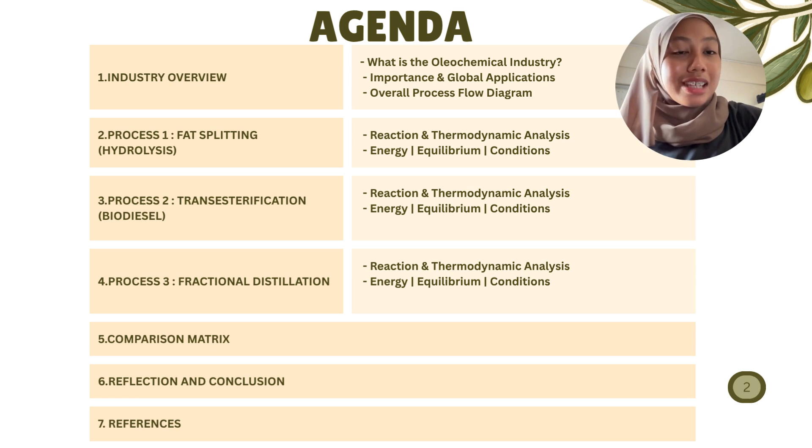So our presentation will begin with a brief overview of the industry and its importance, followed by an overview of the global oleochemical market. Next, we will discuss the production process and the main types of oleochemical product, which has three. Firstly is process one, which is fat splitting. Next is transesterification, and lastly is fractional distillation. Next, we look into the comparative guide, which is thermodynamics in oleochemical processing. After that, we will conclude the presentation and also there's some reflection on our discussion.

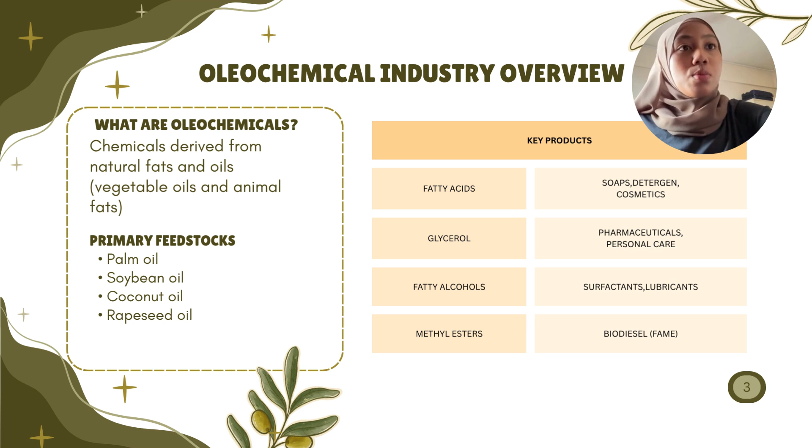Firstly, let's look at what the oleochemical industry is. So, oleochemicals are chemical products derived from natural oils and fats, mainly vegetable oils such as palm oil, coconut oil, soybean oil, and animal fats. Unlike petrochemicals, which are produced from crude oil, oleochemicals come from renewable and biodegradable resources, making them more environmentally friendly. The industry mainly produces fatty acid, fatty alcohol, glycerin, and fatty ester. These products serve as essential raw materials for manufacturing soap, detergent, cosmetics, personal care products, lubricants, pharmaceuticals, food additives, and even bio-based plastics.

Next, I will discuss the importance of the oleochemical industry and its global application. The oleochemical industry is increasingly recognized as an important sector because it supports the transition toward more sustainable and environmentally responsible manufacturing. One of its key advantages is that oleochemicals are derived from renewable resources such as plant oil and animal fats. Unlike fossil-based feedstock, these resources can be continuously replenished, making them a more sustainable option for long-term industrial use. In addition, oleochemicals are biodegradable, meaning they can naturally decompose in the environment. This characteristic reduces their environmental impact and makes them a preferred alternative to many petroleum-based chemicals, particularly as the industry seeks to comply with stricter environmental regulation.

Another significant advantage is their versatility. Oleochemicals serve as essential raw materials in a wide range of industries, including personal care and also biofuels. Their diverse applications demonstrate their importance in supporting both industrial production and everyday consumer products. Malaysia also plays a significant role in the global oleochemical industry. As one of the world's leading producers of palm oil, the country provides a reliable and abundant supply of feedstock for oleochemical manufacturing. As indicated on this slide, Malaysia produced approximately 19.9 million tons of crude palm oil, highlighting its contribution to the global supply chain.

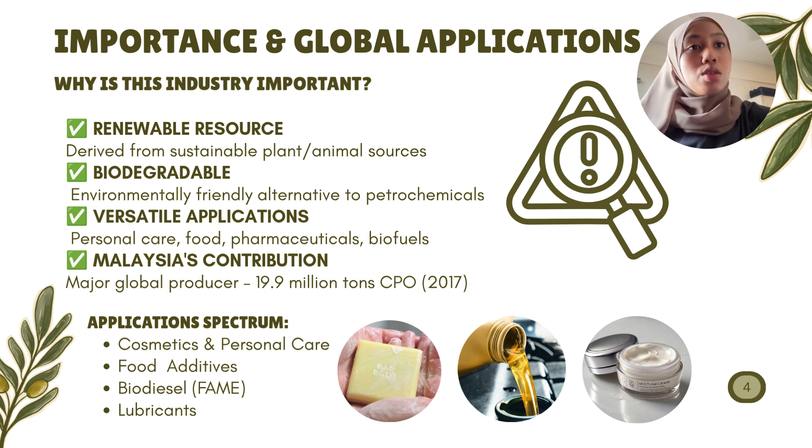In terms of global application, oleochemicals are widely used in the production of cosmetic and personal care products, where they function as surfactants, emollients, and emulsifiers. They are also incorporated into food additives, utilized in the production of biodiesel, particularly fatty acid methyl ester or FAME, and applied in the formulation of lubricants for industrial and automotive use.

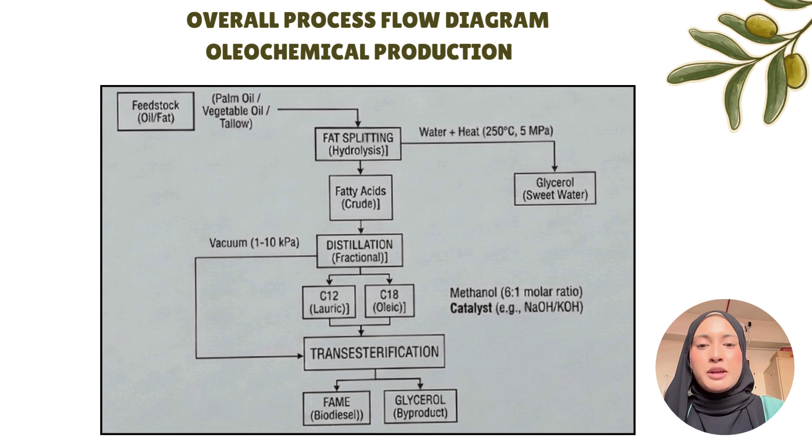Now, I will continue to explain the overall process flow of oleochemical production. We start with the feedstock oils or fats such as palm oil, vegetable oil, or tallow. These undergo fat splitting, also known as hydrolysis, where triglycerides are broken down using high temperature and pressure water. This produces crude fatty acid and also glycerol. Next, the fatty acids are purified through fractional distillation under vacuum conditions, separating them into components like lauric acid and also oleic acid. Finally, through transesterification with methanol and a catalyst such as NaOH and KOH, we will obtain fatty acid methyl esters, FAME, commonly known as biodiesel, along with glycerol as a byproduct. This diagram gives us the big picture of how natural oils are converted into valuable oleochemicals.

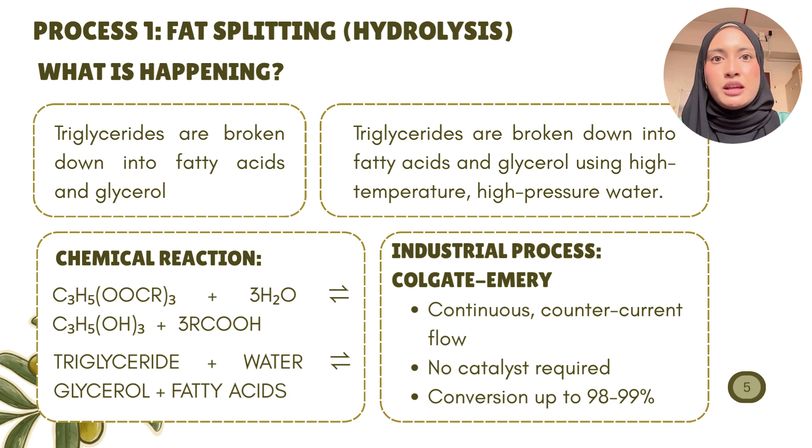Let's zoom into the first process, which is fat splitting. Triglycerides are broken down into fatty acids and glycerol using high temperature and high pressure water. The chemical reaction is: one triglyceride molecule reacts with 3 water molecules to form glycerol and 3 fatty acids. In industry, the Colgate-Emery process is widely used. It is a continuous countercurrent flow system that requires no catalyst and achieves conversion rates of up to 98 to 99%. This makes fat splitting highly efficient and practical for large-scale oleochemical production.

Next, let's talk about the thermodynamic analysis of process 1, which is fat splitting. So the first one is thermal effect. It is between 150 degrees Celsius and 280 degrees Celsius. The reaction shows no significant heat change and it is thermally neutral, with delta H approximately equal to 0. The next one is energy requirement. Even though the reaction itself doesn't require heat, energy input is needed to reach operating temperatures of 250 to 330 degrees Celsius, to maintain water in the liquid phase under high pressure and provide steam for stripping. Typically, about 26 pounds of steam are required for 100 pounds of tallow.

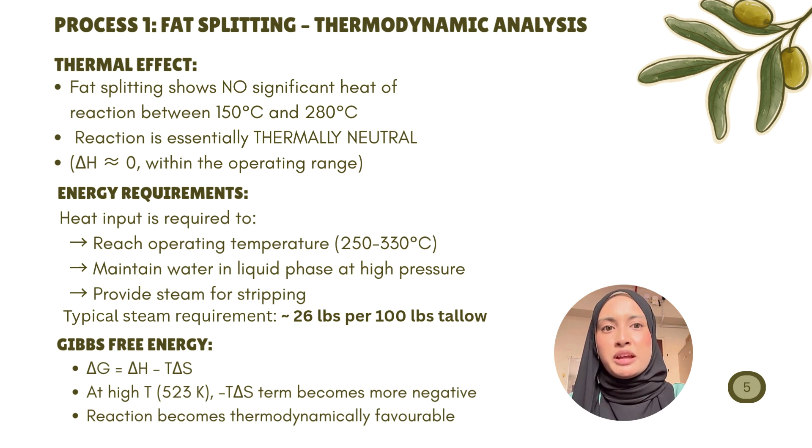Lastly is Gibbs free energy. The key driving force is entropy. The Gibbs free energy equation is delta G equals delta H minus T delta S. So at high temperature, the minus T delta S term becomes more negative, making the reaction thermodynamically favorable.

Good day everyone, so I will continue with process 2, which is fractional distillation. After hydrolysis, a crude fatty acid mixture containing different fatty acids is produced.

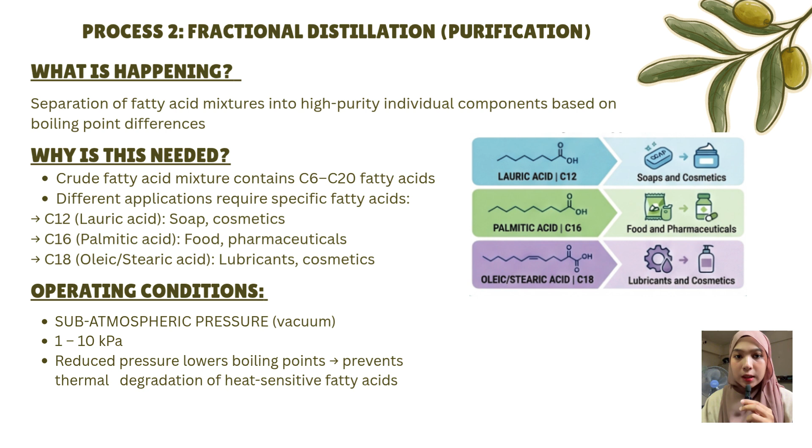So the purpose of fractional distillation is to separate these fatty acids into high purity individual components based on their boiling point difference. This separation is important because different fatty acids have different industrial applications. For example, lauric acid C12 is used in soap and cosmetics. Palmitic acid C16 is used in food and pharmaceuticals, while oleic and stearic acid C18 are commonly used in lubricants and cosmetics.

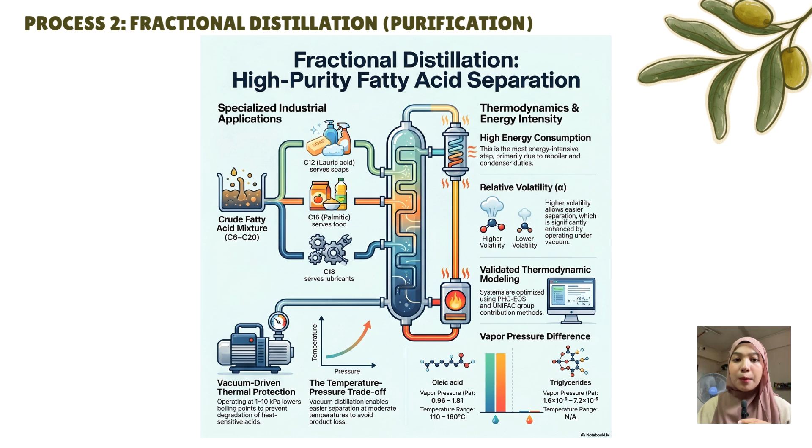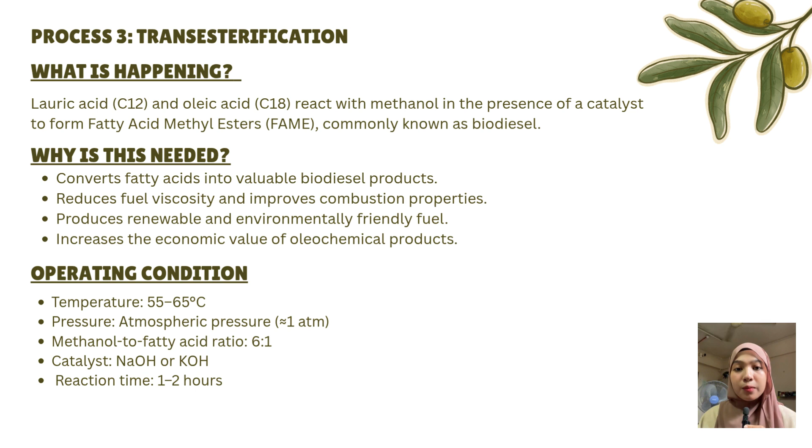After purification, the fatty acids undergo transesterification. In this process, fatty acids react with methanol in the presence of catalysts such as NaOH or KOH to produce fatty acid methyl ester, or FAME, which is biodiesel. This step is important because it converts fatty acid into a valuable renewable fuel with improved combustion properties and lower viscosity. The reaction is typically carried out at 55 to 65 degrees Celsius at atmospheric pressure and a methanol to fatty acid ratio of approximately 6 to 1.

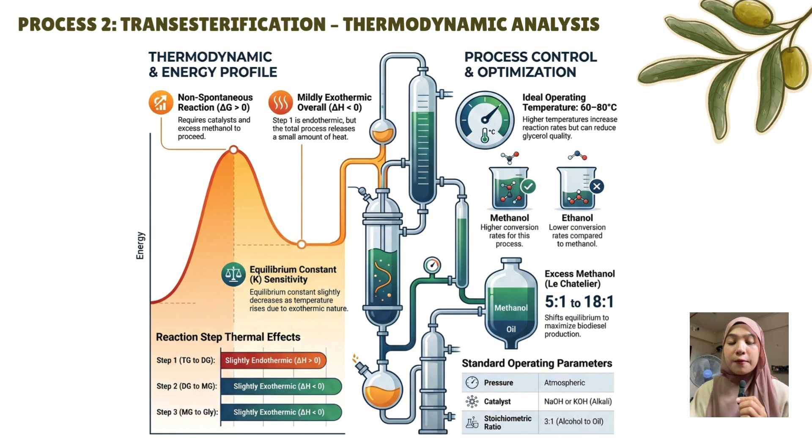From a thermodynamic point of view, transesterification is a mildly exothermic reaction, meaning it releases a small amount of heat. A catalyst is used to lower the activation energy and increase the reaction rate. Another important principle is Le Chatelier's principle. Excess methanol is added to shift the equilibrium toward biodiesel production, resulting in a higher conversion rate. In conclusion, thermodynamics plays a key role in both fractional distillation and transesterification by optimizing temperature, pressure, and reaction conditions to maximize efficiency, product quality, and biodiesel yield.

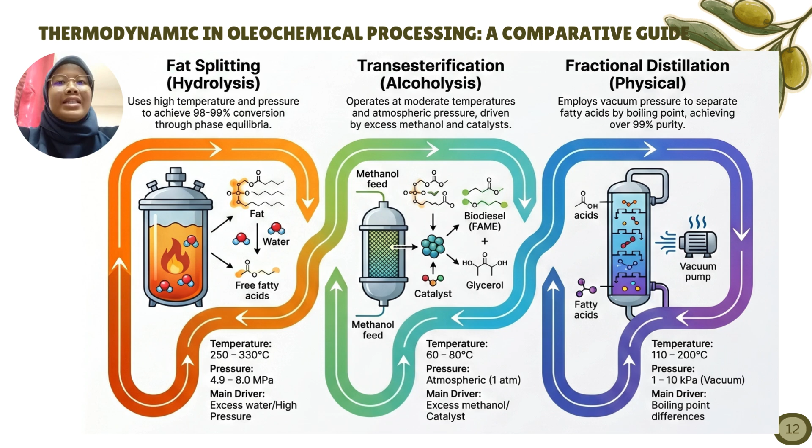And finally, on the right, we have fractional distillation. This is a purely physical separation process governed by vapor-liquid equilibrium, VLE. We employ a high vacuum of 1 to 10 kilopascals to lower the boiling point, allowing us to safely separate valuable fatty acids by their unique boiling point differences at temperatures between 110 to 200 degrees Celsius without thermal degradation, reaching over 99% purity.

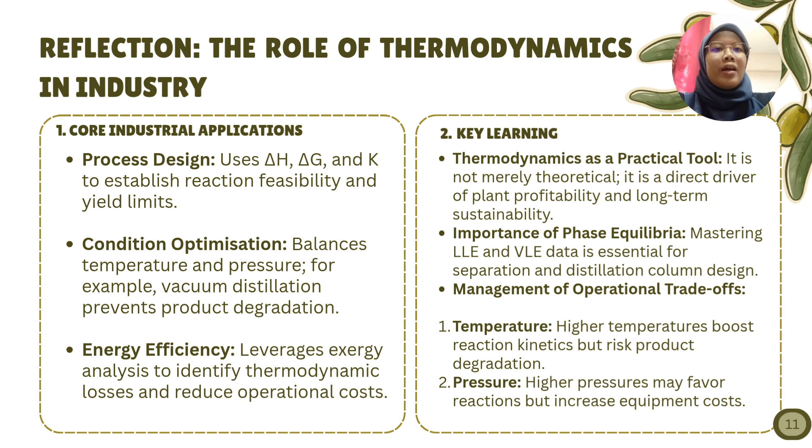Importantly, phase equilibria data, specifically liquid-liquid and vapor-liquid data, is absolutely vital. Without precise VLE data, sizing separation columns and choosing the correct number of stages is impossible. And finally, we must always balance operational trade-offs. Higher temperatures accelerate reaction kinetics but threaten product degradation. Higher operating pressure can favor equilibrium conversion but will also exponentially increase our capital and equipment costs.

To conclude our presentation, let us summarize our key conclusions on thermodynamics in the oleochemical industry. The fundamental role of this industry is converting renewable fats and oils into highly diverse, valuable products. Every stage of this transition is governed strictly by thermodynamic rules, whether it is the phase equilibria of fat splitting, shifting the chemical equilibrium of transesterification using excess reactant, or using vacuum VLE for fractional distillation.

Operational optimization will always require a delicate balance. We must consistently weigh reaction kinetics against equilibrium limits, minimize overall energy consumption while maintaining product quality, and secure high conversion without triggering thermal degradation. Understanding and mastering thermodynamics is the ultimate foundation for efficient, green, and modern process design.

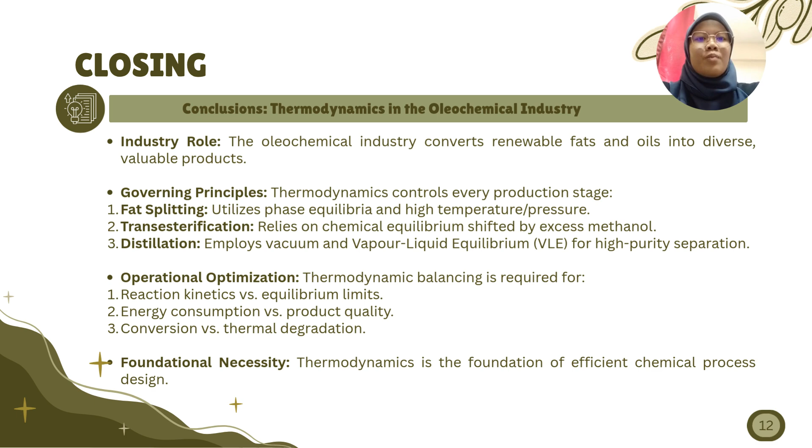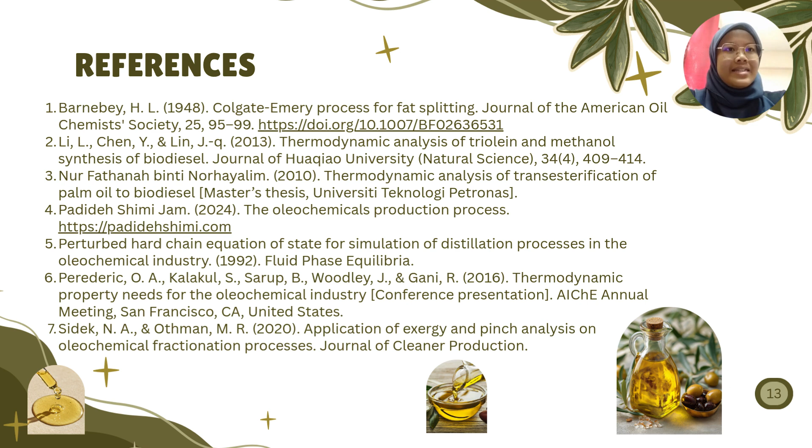So, here is the list of academic and industrial references that support the science behind this work. These documents range from holistic, foundational industrial processes like the 1948 Colgate-Emery fat splitting patent to modern studies examining thermodynamic properties of triglycerides and methanol synthesis. Our distillation and fractionation processes are grounded in rigorous scientific modeling, relying on established equations of state and modern exergy analysis techniques to ensure maximum efficiency.